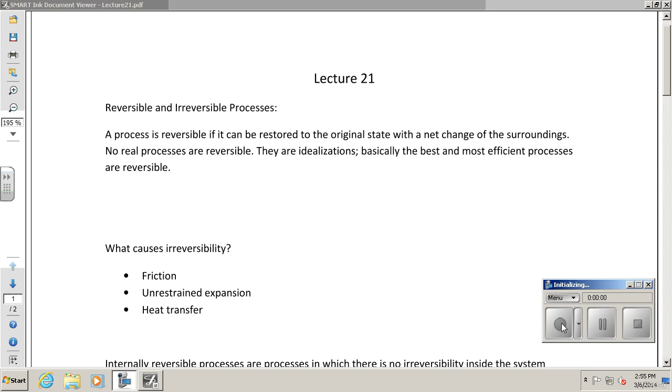Okay, what I want to do now is talk about a couple more concepts related to the second law of thermodynamics. One of which that's very important is reversibility. Okay, when you think of reversibility, I want you to imagine a few things.

First off, I don't know if you've ever done this before, but as a kid, I had one of those super balls. I loved throwing a super ball around, bouncing and stuff like that. And I remember if you had a hard surface in your kitchen and you drop that super ball, if you just hold it, we're not talking about throwing it down, I'm just saying you hold it and you just drop it. It hits the floor, bounces up, and it almost gets back to your fingers. Almost. But it never does exactly to your fingers. It never reverse bounces right back to where you dropped it in the first place. But it's pretty darn close, right?

Also, if you remember, if you swing on a swing real good, and you just give up trying to work your legs and your body to swing up further, if you just stop and let yourself swing, you'll almost get back to where you swung before, but just a little short of that, okay? Both those processes are almost reversible, okay? Dropping a super ball and having it bounce up, it almost comes back to where you were. If you jump on a trampoline and you don't use any of your legs, you almost get back to where you were when you jumped.

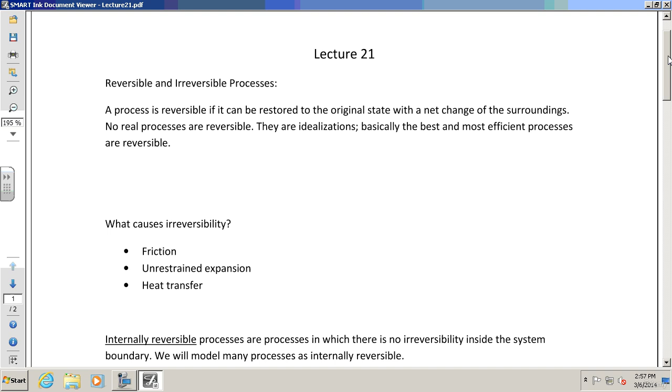Okay, so why do we have this definition? The reason is that the most efficient processes, the best processes, thermodynamically speaking, are reversible. Okay? And reversibility is important because if we can find irreversibility, that is wasted energy. Okay? So that's wasted energy. That's energy that's not being used for what we want to. So what causes irreversibility? There's lots of things. Okay? I mean, this is not exclusive to these three things.

But these three things are very common. Friction. If you have friction in motion, or I guess you could think of air resistance as kind of like a friction, you know. If you have friction, you are going to cause irreversibility, okay? If you have something that slides on a very high friction surface, it's going to stop and you're going to lose that energy, right? Friction takes away energy, okay? So friction definitely causes irreversibility.

Unrestrained expansion. Here's an example. Think about a balloon. Let's say you open up the balloon and you let all the air out of the balloon. Is it real easy to get that air back in? Does the air just spontaneously jump back in the balloon? No, it doesn't, right? When you have that unrestrained expansion, if the air just goes out into the room, it's not going to come back unless you blow it back in or you hook it up to something that's going to blow it back in, right? That's not a reversible process. It just expanded and that's it.

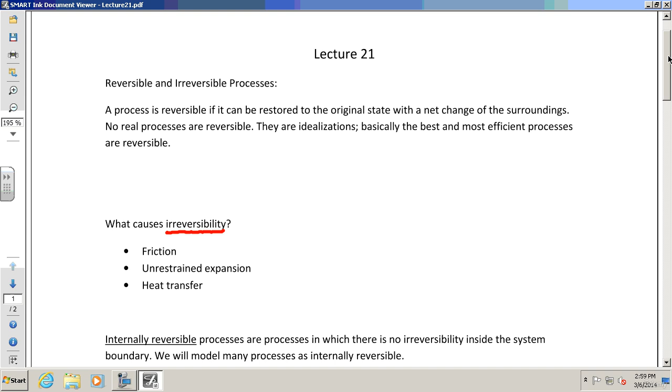It's gone. Okay? And another one is heat transfer. Okay? If you have heat transfer, specifically heat transfer through a finite temperature difference, you can't bring that back. So if you have your coffee cup, this is again second law of thermodynamics. If you have your coffee cup and it's hot, and then all of a sudden it cools down to room temperature, the only way to bring that back is to put a heat source back in, right? It's not going to naturally just come back, right? It's not reversible. That's an irreversible process for that to happen. You can't just bring it back to the temperature it was before, okay?

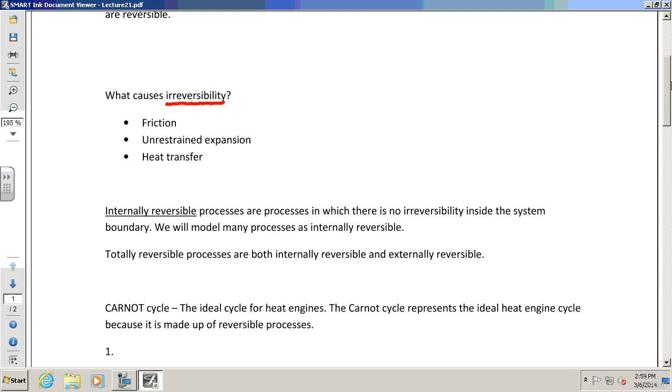Those processes, when you have irreversibility, you have basically wasted energy, wasted useful energy. Now, you didn't really waste the energy, okay? Energy doesn't really get wasted, by the way, right? You can't really destroy energy. It's just transferred to heat. A lot of these transfer to heat or to other things, and you can't use it anymore. It's not useful. Okay? When that coffee cup cooled down, you didn't really waste the energy. It just went into the air around us, right? And that's not very useful, right? Okay? So that's when you have irreversibility.

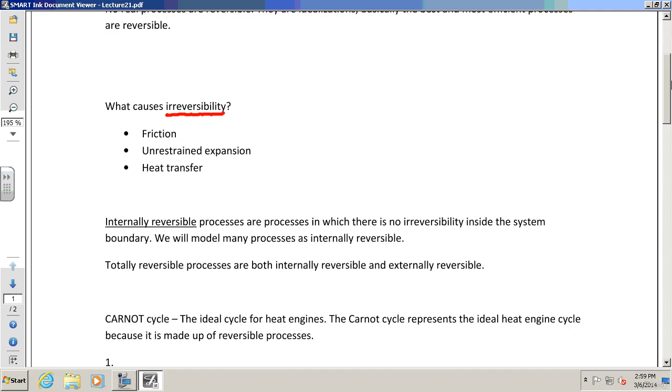That is basically a cause of inefficiencies. Okay? So we are going to look for things that are irreversible, and we're going to try to stop them. We're going to try to make processes as reversible as possible. Okay? Now, there's another concept here that's important. Internally reversible.

When something's internally reversible, it's a process where there's no irreversibility inside the system boundary, okay? So what we're saying is, let's say we have some kind of boundary. It doesn't matter what it is. Remember, a boundary is just something we do in our mind. It's not a real physical boundary. This is just in our mind. We have a boundary. We can say that it's internally reversible if inside the boundary there's no irreversibilities, okay?

Now, is there anything that's ever truly internally reversible? No, okay? But there's a lot of systems that come pretty close to that, okay? That inside the boundary, it's mostly reversible. It's really, really close to being reversible. So we're going to model things sometimes as internally reversible processes, okay?

We're going to say that inside the boundary, there was no friction, there was no unrestrained expansion, and there was no heat transfer inside. Now, there could be heat transfer to the outside. That's okay. You can still have an internally reversible process and have heat transfer to the outside. Just because it's internally reversible doesn't mean it's totally reversible, okay? Totally reversible means it's both internally reversible and externally reversible, okay?

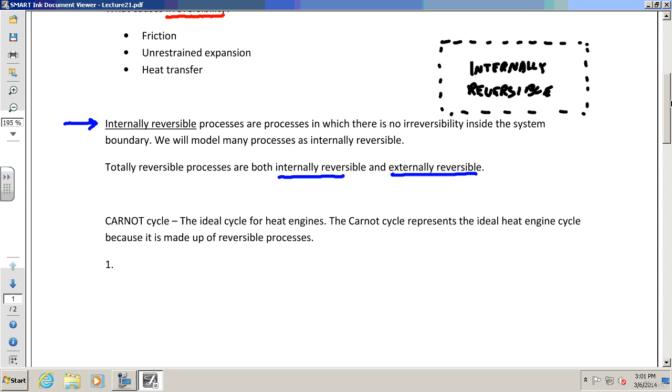Now, all of this is probably going to confuse you at first, okay? And don't worry about that. You're probably going, I'm not really sure what you're saying there. I'm a little confused. That's okay, all right? We'll get there, all right? So it's okay to be a little confused by this, all right?

What I want to do, though, is I want to talk about this thing called the Carnot cycle, okay? This is the first time we're going to talk about a cycle, but we're going to talk about a lot of cycles, particularly when we get to the last 3-4 weeks of the class, where we spend a lot of time on cycles, because really thermodynamic cycles are the heart of what we do. Your engine in your car is a certain cycle, okay? Power plants run on certain cycles. Refrigeration has a cycle. Lots of things run on a cycle, okay?

And a cycle, remember, is something that takes a substance, does some different processes, and brings that substance back to where you started. If you don't come back to where you started, you're not a cycle, okay? Cycles come back to where they started, okay? So a Carnot cycle is probably the most important cycle, okay, that we're going to study. It's the ideal cycle for heat engines, okay? Carnot cycle represents the ideal heat engine cycle because it's made up of reversible processes, okay?

Now, before I get started, no one has ever built a Carnot engine. No one's ever done it. It's kind of like the ideal. It's like the perfect, okay? No one's ever done it. Now, I hesitate to say no one will ever do it because there's been lots of things in time people have said won't happen, and they have, right? So I hate to say it won't happen, but let's just say it's unlikely, okay? Because it's pretty much perfection, okay?

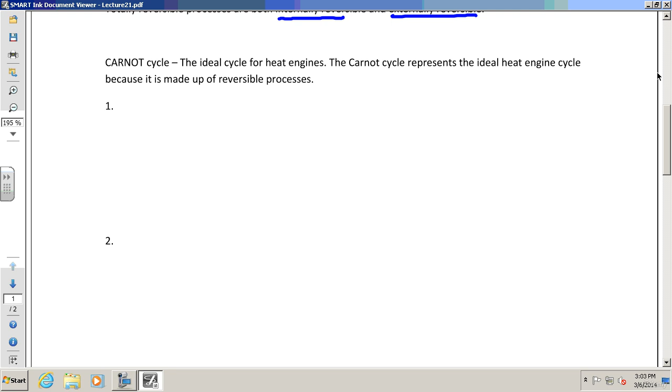And I don't know about you, but I've never seen perfection before, right? I mean, in reality, there's no such thing as perfect systems, perfect people, perfect anything, right? Everybody has things wrong. Everything has something wrong with it, right? Nothing's perfect, okay? So there's no such thing as perfection, and certainly in thermodynamics, there's no such thing as this. But this is the best you can do, the Carnot cycle, okay?

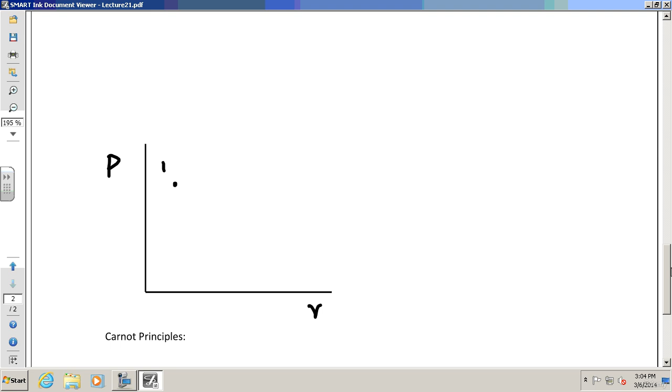So now I'm going to go through each process. On the second page, what I'm going to do here is I'm going to write this process on a PV diagram, which you'll see why when we get to the end, why we do that, okay? Get to the end, you'll see why. So, yeah, specific volume. Pressure versus specific volume. We're going to start, by the way, at state 1. You can put this dot right here, about right there. We'll say that's state 1. Just the general point right around there. That's state 1, okay?

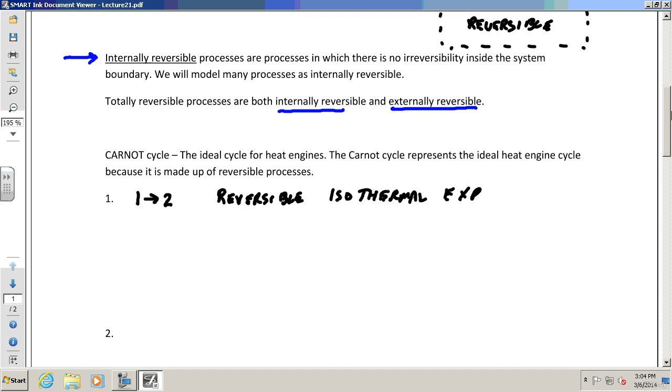Let's go back to the first page and say, what's the Carnot cycle? All right, here's the Carnot cycle. The first step of the Carnot cycle takes us from state 1 to state 2, and it is a reversible, remember everything's reversible here, it's a reversible isothermal, what does that mean? Yeah, constant temperature, expansion. Let me draw you a figure to help visualize this. Let's draw a piston cylinder.

Okay, if we have expansion, that means the contents inside the cylinder are getting bigger, but it's isothermal. It has a temperature, we're going to call it TH for hot, because this is at the hot side. And what's surrounding this cylinder is something that's been kept at a constant temperature also of TH.

Now, if you know anything about the ideal gas, when a gas expands, it wants to cool off. We're having expansion here, but it's isothermal. That means it's not cooling off. What happens is, as this thing expands, it cools off a super tiny amount, a millionth of a degree, whatever. It's tiny.

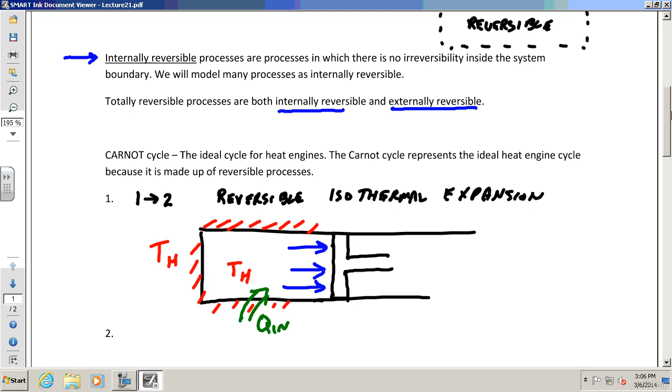And then the surroundings transfer heat in to the cylinder so that it keeps it at that constant temperature. So you have the surroundings at the same temperature as the cylinder. As this expands, what's inside wants to cool, but the surroundings put enough heat into it to keep it at that same temperature. That's going to be a reversible isothermal expansion. Remember, reversible means we can take it back. I can easily go back from 2 back to 1, and reversible means it's as efficient as it can be.

Okay, that's stage 1. Let me show you what that looks like on our PV diagram. I'm going to put 2 here, and it's probably going to look something like this. And all of this is at a temperature TH. Remember, it's isothermal, so 1 and 2 are at the same temperature. Yeah, there's a slight curve to that. Everybody got that? It's kind of down and a little bit of a curve. I could have made it a little more of a curve, but it just depends.

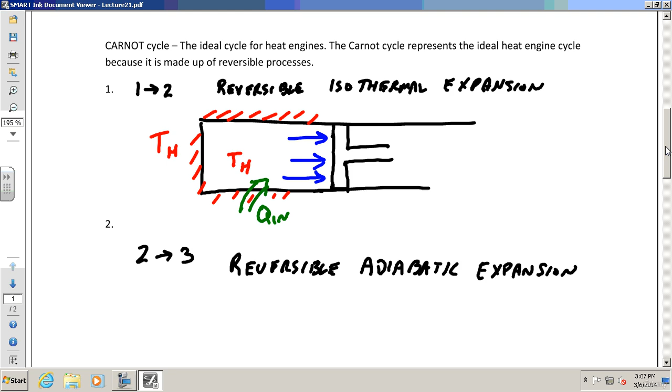All right. The next process takes us from 2 to 3. This process is also reversible, but it's an adiabatic expansion. What does adiabatic mean? No heat transfer. When you expand something, it wants to cool off. What you do here, very carefully, and this is hard to do, is as it cools off, the surroundings have to cool off with it, so there's no heat transfer between it and the surroundings. It's going to go from a temperature TH down to a temperature TL. It's going to go from hot to cold because it's adiabatic. There's no heat transfer here, but as you expand, it's going to cool off.

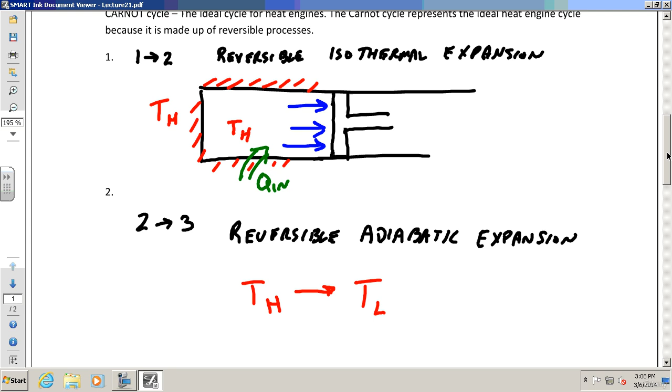This step is kind of impossible, really. The first step you could probably build, the reversible isothermal one. The second one is going to be a lot harder, but let's just say you could. We can come close. So what does that look like on our PV diagram? It's going to look like this, again with a little bit of a curve. And that's going to be state 3, at a lower temperature, TL. So there are 2 expansions: an expansion that occurs without temperature change, and then another expansion that occurs without heat transfer.

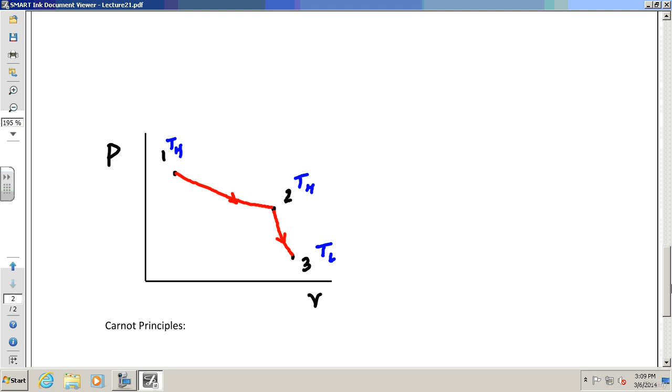Remember, you might say, who cares about an expansion? But thermodynamically, expansions mean work. When things expand, that means we get work. That's good. Remember, work is the integral of PdV. I don't ask you to memorize too many equations, but I do ask you to memorize that one. So when we have the integral of PdV, what I've drawn there is like an area under the curve.

All right. Let's go back and do the next step, where now we've got to reverse it. We've got to go back. So now we're going from state 3 to state 4, and it's reversible again. And now it's an isothermal compression.

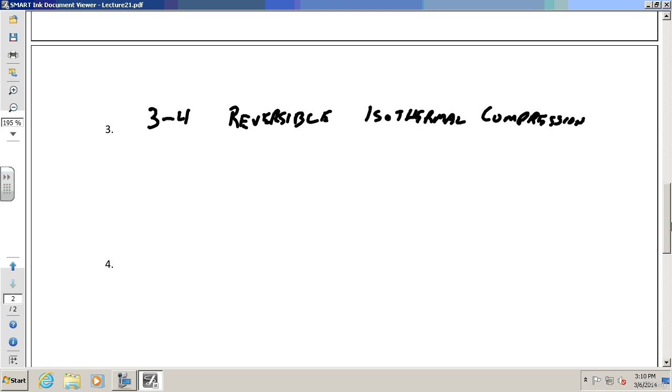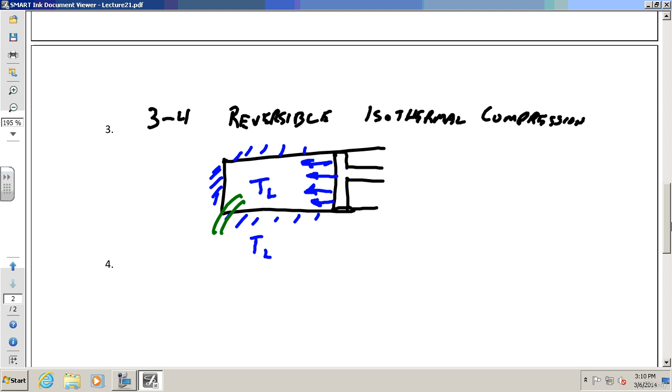So this time, remember, I'm at the low temperature side. So I'm at low temperature. And what I'm going to do is compress this gas. It's basically like air. I'm going to compress it, but as it compresses, it's going to want to heat up. But what I'm going to do is, as it heats up, I'm going to transfer that heat out.

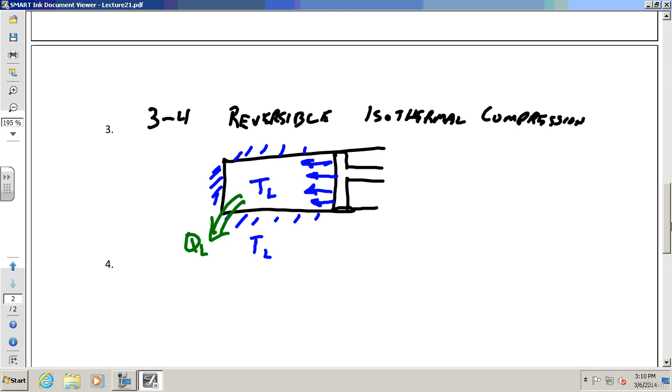Okay? Because as I compress this gas back again, it's going to want to heat up. It's going to say, oh, I'm heating up, I'm heating up. But nope, I've got the surroundings ready to absorb that heat, so it keeps it isothermal, constant temperature TL. Same thing, basically, as before, just the other way.

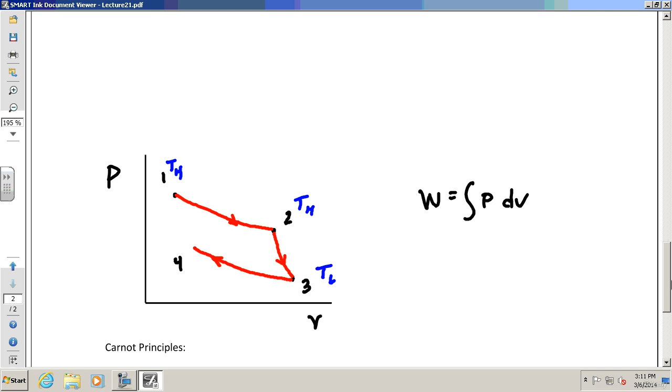What does that look like on my chart here? What that looks like on my chart is this. Probably something like this, 4. And I'm going to go, probably should have written that a little higher. Let's put that a little higher. Maybe there. Okay. And it's going to look something like this. And finally, obviously I got to go back to 1, or it's not a cycle. Something like that. Each one of those lines has a little bit of curve to it, nothing straight.

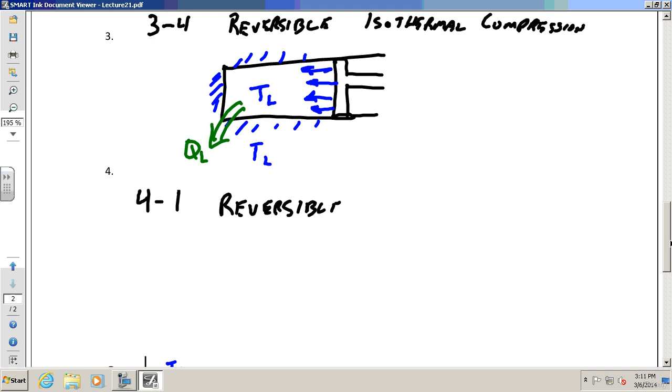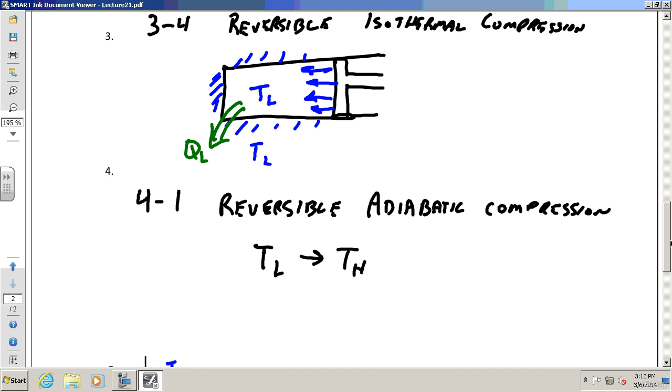So yeah, 4 is still TL because it's isothermal. Everything at 3 and 4 is at the same low temperature, whatever that temperature may be. Okay. So obviously the final process here, you might guess, 4 to 1, is a reversible adiabatic compression. And what that does is it takes my temperature from TL back up to TH, the high. Because if you compress something and you don't have any heat transfer, it's going to have to heat up. Okay? That right there, that shape right there is the Carnot cycle.

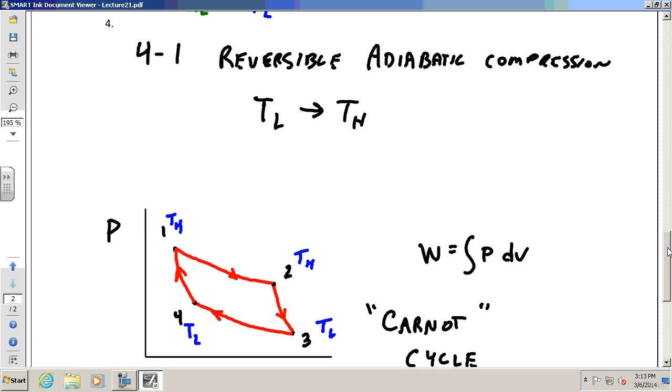I'm going to go here to Pi Tau Sigma. You may not have heard of Pi Tau Sigma. What Pi Tau Sigma is, by the way, is the honor society for mechanical engineering. Mechanical engineering has an international honor society. And when they looked at all of mechanical engineering and designed a symbol to represent honors in mechanical engineering, what do you think they used? Yeah, does that look familiar? That's the Carnot cycle.

Now, when I went to school at Purdue, they had a statue, like a little monument to the Carnot cycle. It was right there, staring you in the face when you came out of the building. So, okay, that must be important. They don't make monuments of things that are just whatever, right? They make monuments of things that are really important. So this must be important. It's what somebody thought represented all of mechanical engineering, the Carnot cycle.

And I think it's, one, because it is important, and two, it represents the ideal. It's the perfection. It's the best, okay? That's really what the Carnot cycle is. It's the ideal. It's the best. And so the principle here, this last thing, is that the Carnot heat engine is the most efficient heat engine, okay? You can't get any better. It's most efficient.

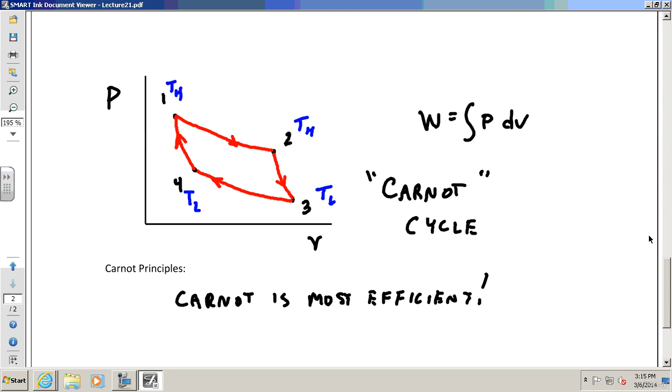And as you'll see next time, the Carnot principles also are going to be very helpful for us understanding how efficient something can be. And it helps us actually define temperature. So there's a lot of very, very important implications from the Carnot cycle. And we will do those next time. All right.